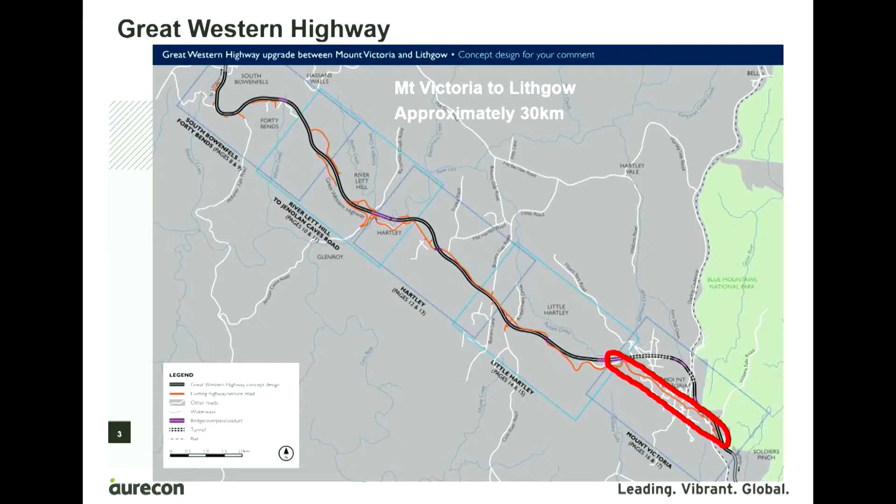At that stage, the team had 20 or so people and had been at it for months. Everyone was working flat out and our office space was full. There was no one available to help with drafting for several weeks into the future, and even then, the CAD team would give us no promises. With so much hinging on the preparation of drawings, we were not confident we had anyone at all to do the CAD tasks. The design program, however, required the first preliminary concept drawings due less than a month after we started.

15 years earlier, I'd seen 12D used to produce thousands of drawings at Connell Wagner here in Brisbane during planning for the first South East Transit project from South Brisbane out to the edges of the city. At that time, I was a keen AutoCAD and MOSS user, and so I found the choice of drafting package quite interesting and inquired into it.

And I was told that AutoCAD took about 10 minutes to open a drawing, plot the drawing, close down and open the next one, and there were thousands of them to do. It simply wasn't going to be an option. And because 12D worked in a single environment, it was able to plot the drawings directly much quicker.

So back onto the Great Western Highway project. 12D was already being used for all of the survey and design tasks, and I began to wonder whether what I'd seen 15 years earlier could help us meet the short deadlines. I made a suggestion to try 12D's unknown CAD abilities. Being an alliance project, we required buy-in from the JV partners and our client, the RMS.

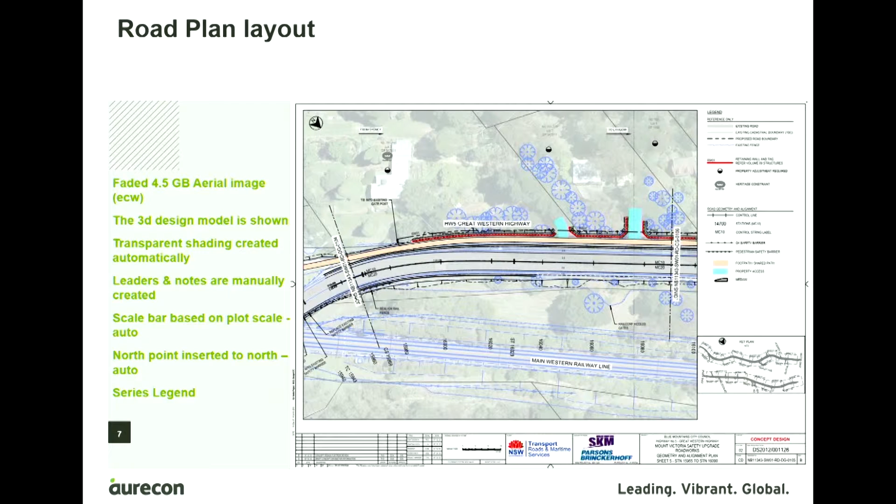So presentation-wise, these were all done to match the larger project that we had. So starting with the road plans, the GAs, you've got the faded aerial image in the background. You've got your road design model showing there. To remove cars and trucks from the road surface, there's a faded fill across the road surfaces. There's scale bars and plot and a series legend on the right-hand side, specific to that drawing.

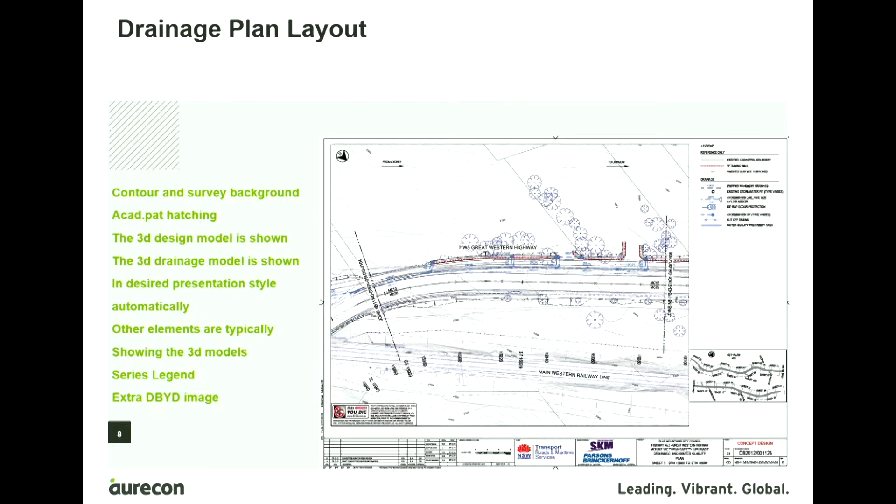Drainage layouts was a little bit similar. It's not easy to see these from 100 miles away, I know. But you've got your contour and survey backgrounds. We've got some hatching coming from AutoCAD .pat patterns. Again, the road models are shown, the drainage models are shown as we want them to show. There's no manual work been put into that. And then on the left, we've got a Dial Before You Dig warning, which is a JPEG or something, and a legend specific to this series.

All of the utilities modelling was done and presented like this. This was the project standard for this work. We've got those call-outs there for the very congested areas.

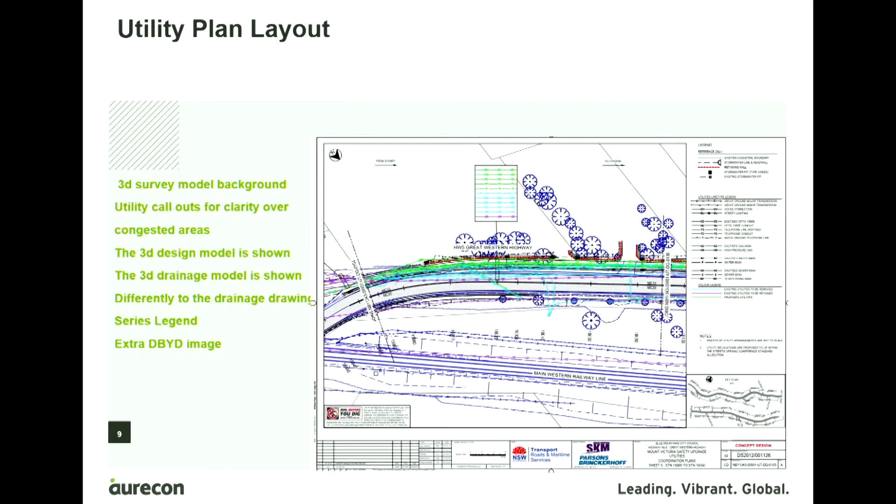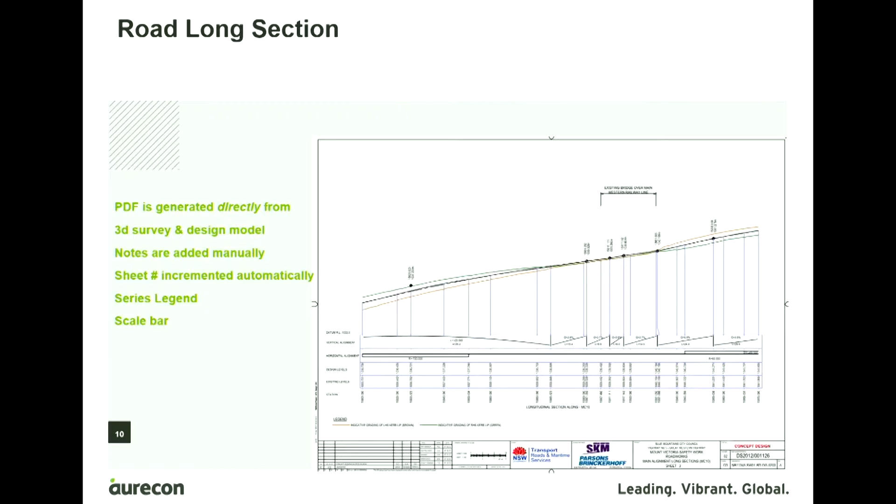Road long sections. This stuff is all generated direct from the model. We didn't see any point putting it into an intermediate system. You go from a model to something else, and then you get back to a PDF. It was kind of a pointless round trip. So, yeah. Cross sections. The only difference from what you're probably doing now to this is the inclusion of the sheet. You're probably nearly there.

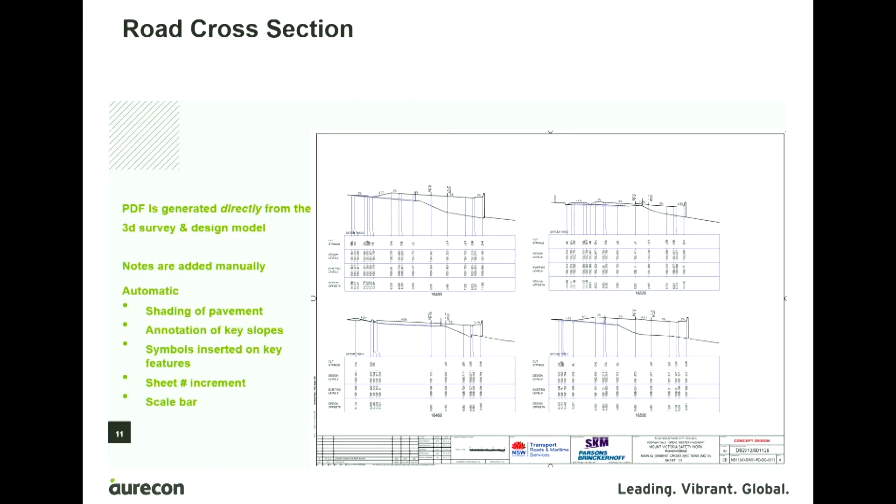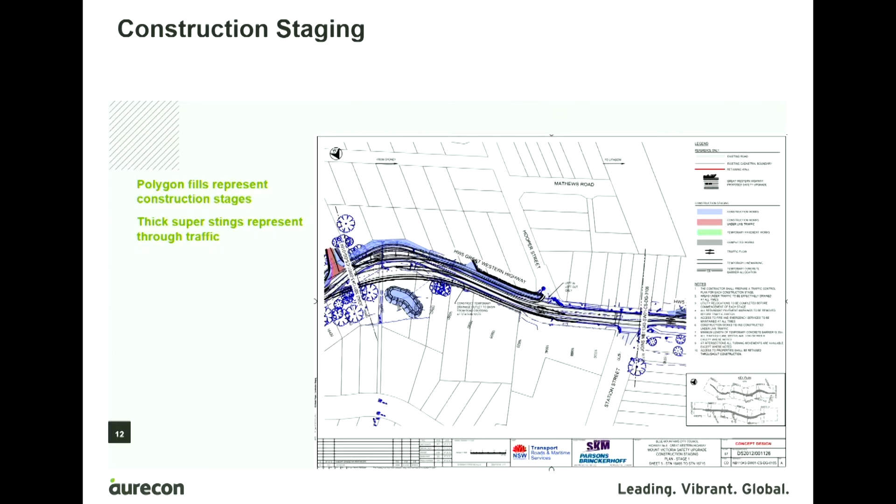We did the construction staging diagram, so there were three main stages. We had different polygons representing construction stages and some thick super strings representing through traffic. So the main benefit of all of this is that a whole series of drawings can be turned around in about 5 minutes.

There's some other benefits as well. So keeping the designer in control of the finished product was quite handy. There's less blame shifting or flick passing of tasks. I'll just let the CAD guys look after that, and the CAD guys go, no, that's a designer's job. You've got to sort that out.

It's great for consistency. Because it's all done through a scripting process, the consistency is there. We didn't need to finish the design 2 weeks before they were required, so we could design right up until Friday lunchtime and have them out by Friday 4 o'clock. And the drawing quality itself was pretty crisp, which does look good once it's printed, and I'll talk a bit more about that in a minute.

In the end, the client was happy with the product, the project directors and managers were happy, and the team was more relaxed than usual leading up to the deadline. We all enjoyed the experience and were keen to do it again. But really the main benefit is all about turning those drawings around in 5 or 10 minutes.

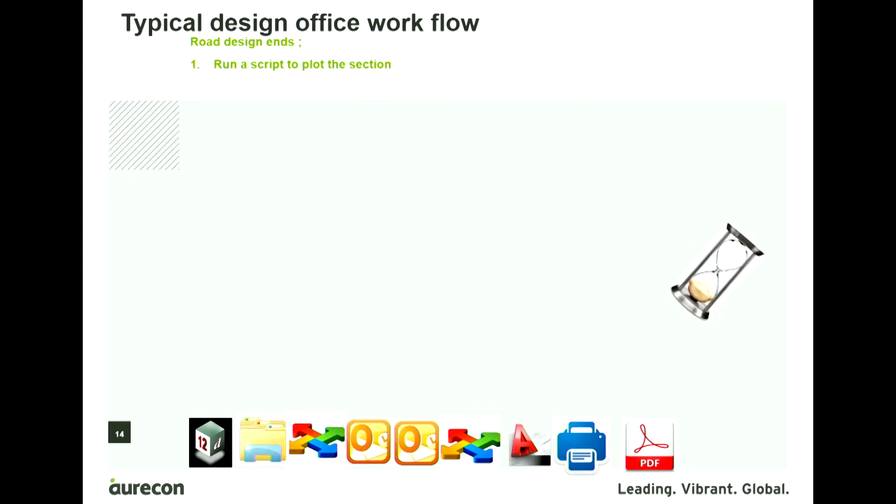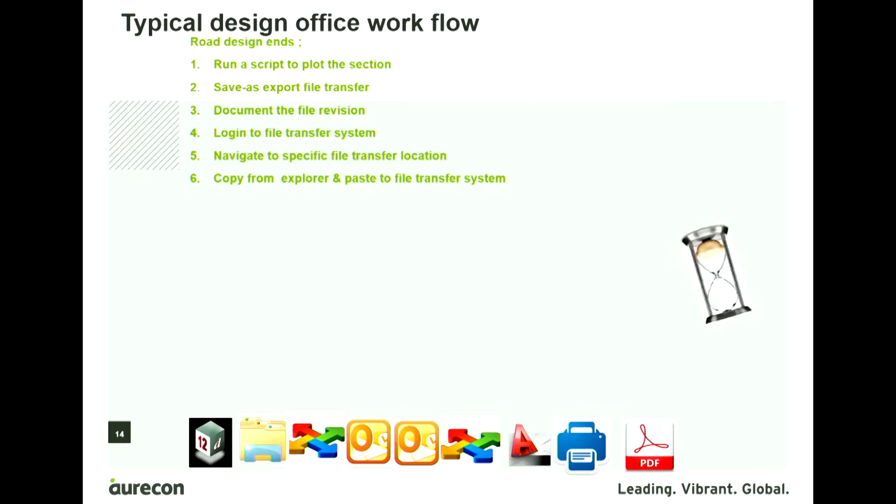Next up, I just wanted to look at the typical workflow involved in producing a road design drawing to PDF, which is, again, where the drawings need to go. So the road design ends. You run a script to plot the sections. You do a file export. You document the file revision. You log into a file transfer system. You navigate to a specific location. You copy and paste from Explorer to the file transfer system.

You do something with a revision code. You email the CAD lead guy. You wait while he returns from his meeting. He forwards it on to someone else. The CAD operator finishes lunch. Then he inspects your work. He supersedes the old XREF. He places the new data in place of the old. And then he runs a plot or a publish routine. And then you get some PDFs. So along the bottom of the view there, you've got some icons to show what the typical system entails.

Assuming that you amended a verge and a batter arrangement and nothing else, the quickest you could hope to see the new plan drawings could be measured in hours. What else is wrong with the workflow? It's very disjointed. It relies on numerous complex systems. It generates distracting emails, generates lots of non-productive work, generates numerous intermediate files, each requiring its own systems and revision control and specialist systems and people.

And the people responsible for the final outputs often have no idea of the engineering content, so are clueless in correcting or highlighting issues and often misinterpret things. Because CAD people don't necessarily know the content of a design, we see them incorrectly applying edits from one road to another or misinterpreting a markup note. Something like "fix on all sheets." To me, that instruction should mean apply this correction to all 10 sheets. It would never mean to enter that text, "fix on all sheets," onto one drawing. But I know you've all seen it.

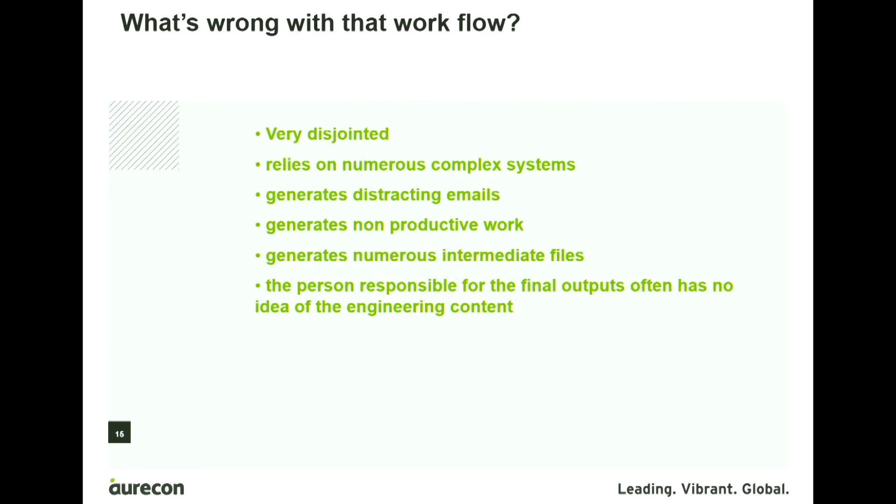Now, I think that the typical design office workflow, which I've got up there, is akin to multitasking. All those steps, they all need doing. They all demand full attention. And then you get 4 emails about file transfers, and then you get one about this week's flight holiday specials and the news from the Big Brother house. And then Peter comes over wanting to talk about the State of Origin results. When you're doing all those steps, it's all prone to interruption. And while we don't have Clippy anymore, when you've got that email pinging in the corner and you're doing lots of little repetitive steps, it's prone to breaking down.

The serious point is that the tasks alone don't appear taxing, but my experience in several firms is that turning around a simple drawing amendment can take hours or sometimes days. And it requires numerous expensive resources. Now, to compare the process that we got to on that Great Western Highway project. The road design ends, we ran a script to plot the sections and compile the drawings. That was it. I was a bit hesitant to put the 2 workflow slides side by side out of fear I'd be seen as unreasonable or picking the most favourable situation to prop up my argument. It seems too good to be true.

But because it's not the file structure that I'd recommend you do, I'll expand that little process out in full. So the road design ends, you save the project. Switch to a project where you're doing the CAD production from, so that you're not mixing the design and the drawing in the same environment. Then reload the shared data and then run the script. So that first slide wasn't the full story, but it's not too far off.

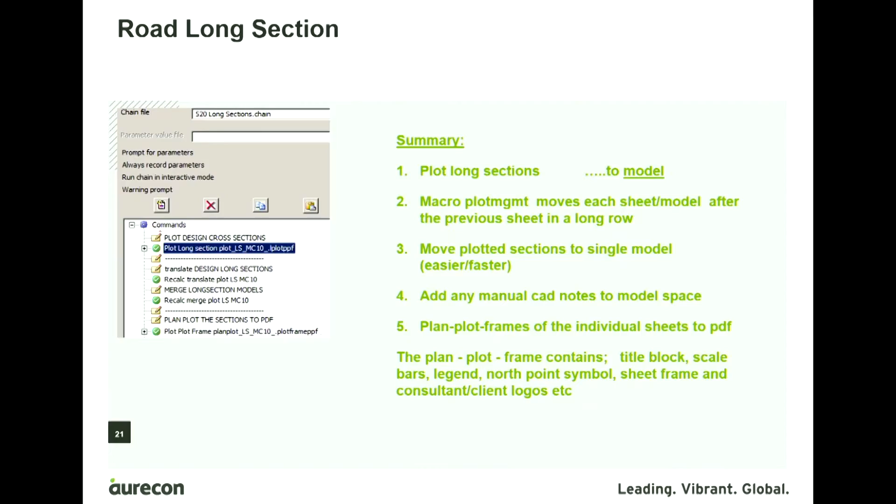And the last step there is the plan plot frames, so rather than plan plots, which might usually sit up on a road centerline, they're just sitting down in that same row. And they're plotted to PDF, and they contain the title block information, scale bars, legend, north points, not that you'd have a north point on a long section, sheet frames, project and consultants logos.

The plans take a bit more. The plans do take more steps, but it's not that much different. First of all, there I was setting the DPI for the raster image, and then it looped into this chain, which cleans a view plots, and if plots doesn't exist, it gets created, and then we just go adding the models that you want to see on the view.

So, usually it's add the raster, then add the survey models, add cadastral models. These are just grouped models which will all have a common prefix. Add tadpoles, shading, the design strings, join lines, add the road names, chainage labels. And once that's done, you're back into that top level chain.

And for each of our sheets, they had their notes in model space, so that only the notes on sheet 1 would be seen on sheet 1. You wouldn't get any notes from sheet 2 bleeding around the edges. So we did them all on unique models, which are called, I can't see what it's called.

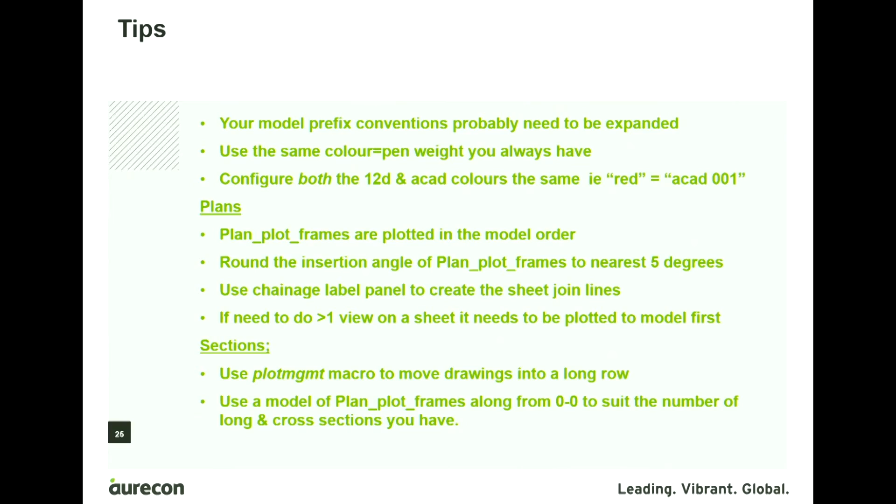And we used big long chainage ticks to create the join lines between sheets. I think our A3 sheets at 1 to 500 or 1,000, you could get about 300 metres length. So we'd just do these big chainage ticks every 300 metres, and that would become our join lines between the sheets. If you need to do more than one plan or one thing on a view, at least in version 10, you had to plot to a model first. Otherwise, you weren't able to do 2 viewports.

When plotting sections, we use the plot management macro to move the sections into a long row. And then we had some plot frames which were down in that space starting at 0, 0 and went along. You have as many there as you have long and cross sections to plot. So I think for our project we had 31 sheets of long sections, and I can't remember how many sheets of cross sections.

So the tools aren't that unfamiliar here. Anyone who's done anything in AutoCAD and anyone here who's done anything in 12d, the concepts are very, very similar. Perhaps the most crucial is what AutoCAD would call the CTB colour table. I don't know what that stands for. But in 12d, the equivalent is a PMF, and it's just where you assign a colour to a pen weight on the final drawing. Yeah, so that's it.